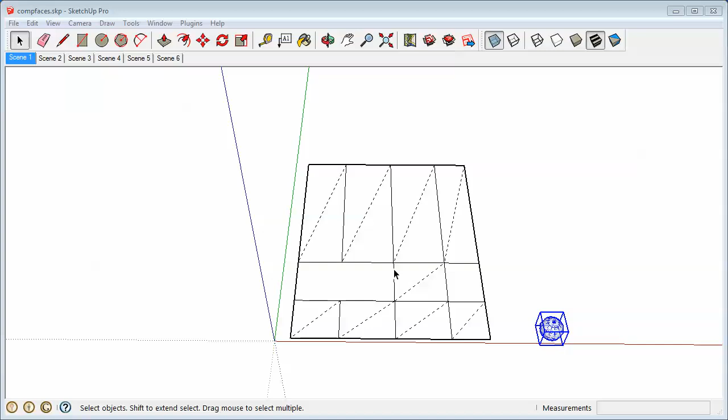Okay, this plugin is called Components onto Faces. Essentially what it does is it just takes a component and copies it onto the selected faces. So if we select all of these faces plus this component, run Plugins, Chris Fulmer Tools, we'll choose components onto each face.

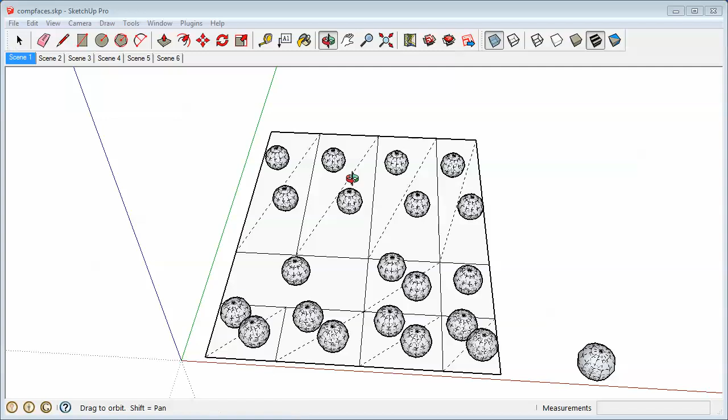And you'll see what that does is that just copies that component as best it can to the center of each selected face. What you'll notice is that even though this line is hidden, if you turn on hidden geometry, you can see this looks like a single face, but in fact it's two separate faces. So it's good to know that this script onto each face is so that you can copy it onto every single face.

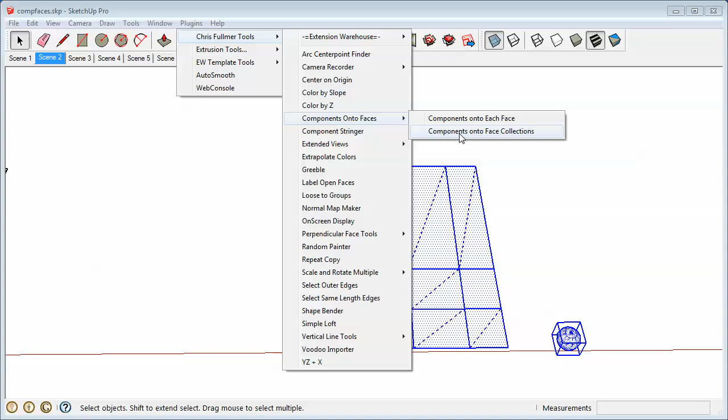But I also have a setting, come over to this one, if we select the same thing, do plugins, components onto faces and components onto face collections. Face collections is kind of ignoring those hidden lines, which acts maybe more like what you would be expecting on something like this. It just copies a single component to this single group of 4 faces or this group of 2 faces. Okay, so that's the basic idea.

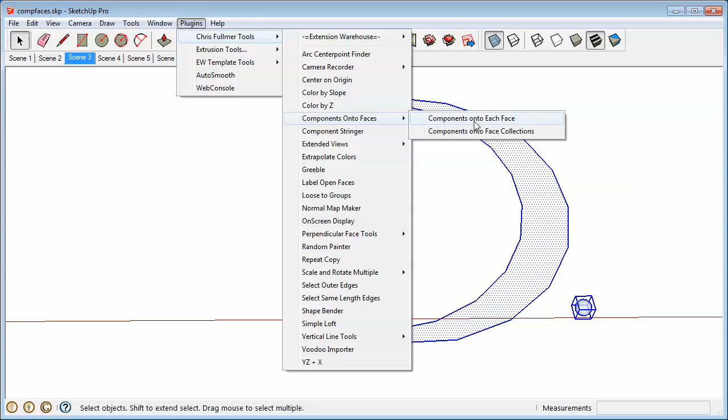So what else does it do? See, this is a very odd shaped face, so it's going to have a really hard time finding the center of it. So we'll go ahead and run it onto the face collection, doesn't matter. See, it tries its best to figure out where the center of that face is, but there's pieces of the face up here, so where it came up with is right here in the middle. So got to realize that's not always perfect, or maybe that is or isn't what you want.

Alright, so it would look like onto each face, perfect. How many times have I needed one of those?

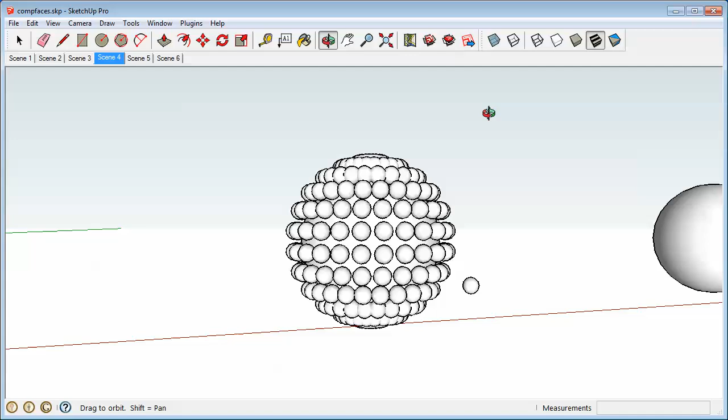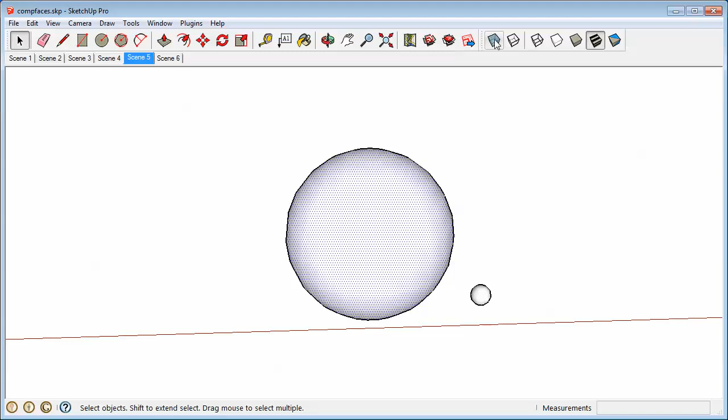Alright, then here is, let's do this one, components onto face collections. As you can see, it's a single big sphere, so there's only one face collection. So if we run that, it looks like nothing happened, but in fact if we turn on X-ray, we can see it actually placed that component directly inside the sphere, because it tried to find the center of that whole collection of faces, and that is in the very center of that sphere.

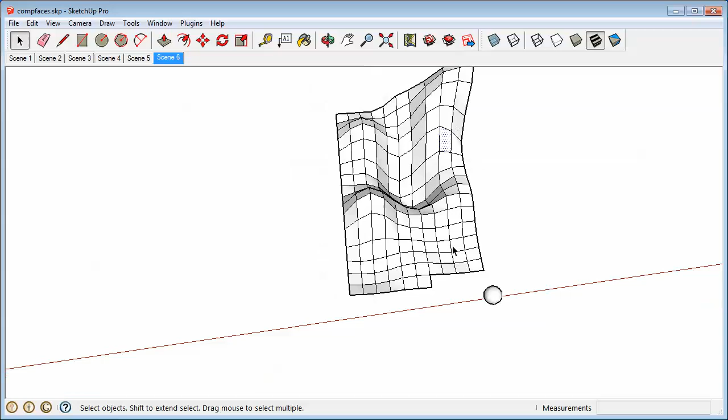And then lastly, if you have a terrain like this, keep in mind these are all triangulated faces, so if you want it to just go one component to each of these quads, just select all, Plugins, Chris Fulmer Tools, components onto faces, components onto face collections, and that'll just do a single component onto each quad there. Perfect. There you have it. And that is how you use Components onto Faces.